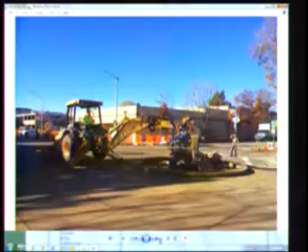On December 23rd, the previous California Avenue fountain was demolished, and the whole plaza has now been regraded and torn up so that we can begin building a new, more inviting plaza for the public.

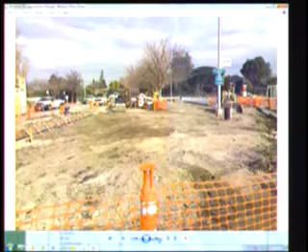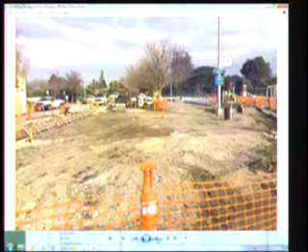The new fountain is by Michael Sabo. There's a picture looking from what was the tip of the island. The fountain would have been in the foreground, and you see the entrance to the bike pedestrian tunnel to the right. So the plaza is expanded, and the site for the future fountain will be further integrated into the plaza.

The timing for that will probably be early February, depending on how things are moving. The fountain itself is coming along beautifully. The water tests have been spectacular.

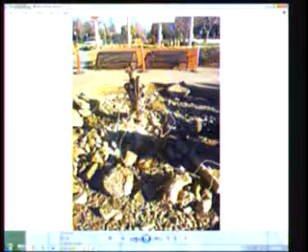There is a time-lapse video of the construction of the fountain taking place in Sabo's studio over this time, so we should have an interesting video of the fabrication of the piece. There's also Michael Sabo taking a video of the demolition of the old fountain.

The next item I have for you in staff comments is regarding the University Avenue tunnels. Just this past Tuesday, we did some further light tests on two different lighting systems to test the saturation and the color we could get from each system.

Ala Ebtekar is teaching a class at Stanford University this semester focused on the further development of the project, a public art practicum completely focused on implementing it. We should have a funding goal identified within the next week or so that we can raise the remaining funds and actually install this temporary public artwork.

And Binta Ayofemi, who is the partner artist on this, is hard at work on the audio portion and the interactive app that would go with it. And that's it for my staff comments.

Great, both are exciting. I think we need to prepare ourselves for the fountain and our drought, and the fact that maybe we won't have water in it for a while. But that's another conversation.

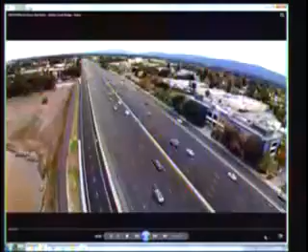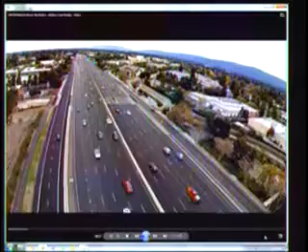For many years, the infrastructure of the automobile has created emissions, noise, and divisions in our communities. Palo Alto has instead embraced a more multimodal future, choosing walking and cycling, developing car sharing, and even self-driving vehicles.

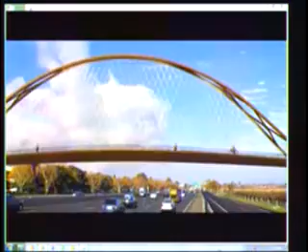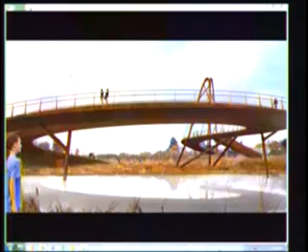Palo Alto's Adobe Creek pedestrian and cyclist bridge is an opportunity to create a more multifunctional, forward-looking infrastructure, drawn from the trajectories of cyclists moving along it and the sinuous waterways of the bay. It is designed not as an icon, but as an experience. Here at the confluence of Adobe and Barron Creeks, we can create an opportunity for experience, for beauty, and a deeper understanding of our natural world.

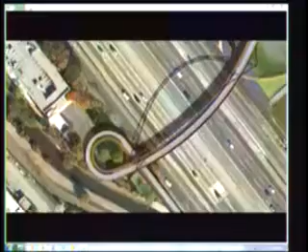West of Highway 101, the bridge ascends in a counterclockwise loop, arcing over the freeway before descending in a broad circle. To the east, a new gathering space provides a place to sit and take in the view, with amenities including bicycle repair. Encircled by the bridge is a new vernal pond and boardwalk, a new way to explore the Baylands.

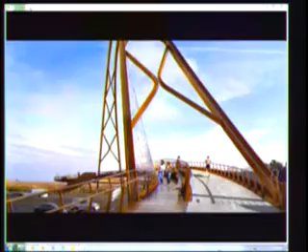Recognizing the challenges of multiple users traveling the same route, the bridge creates dedicated zones for pedestrians and cyclists, lifting one above the other and separating them in plan. Over the freeway, the arch gestures to the sky, creating a cathedral-like space. More than a crossing, it is a space to pause and reflect.

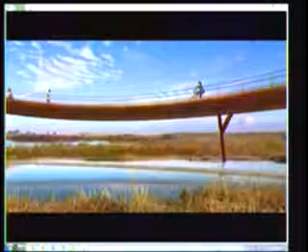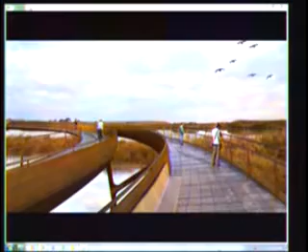Twin pathways over the Baylands integrate structure within their solid interior rails, levitating over the sensitive landscape below, with piers nearly 100 feet apart. West of the freeway, bicycles are outboard, maximizing their turning radius. Here, pedestrians are oriented outward, the walkway expanding to provide a place for birdwatching, resting on a bench, and taking in the view.

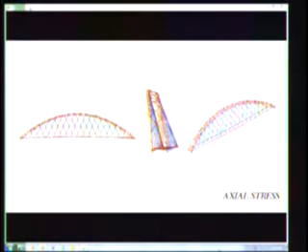Structured as an arch, the bridge leans northward, counterposed to the deck, with a network of thin cables between. A gateway over the freeway, this innovative structure is slender, structurally efficient, and cost-effective, with excellent seismic performance. It eliminates supports in the median and between US 101 and Bayshore, increasing safety and future flexibility. Constructed of corrosion-resistant weathering steel, its warm hues are sympathetic with the Bayland's natural palette.

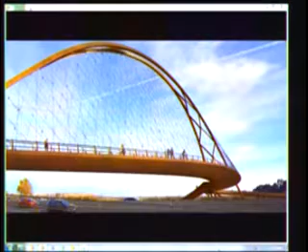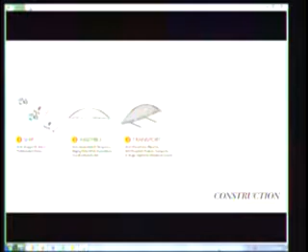Our innovative approach extends to construction. Erected at a temporary location while foundation work is underway, the arch can then be rolled into place with self-propelled modular transports, reducing traffic disruption to a single nighttime closure.

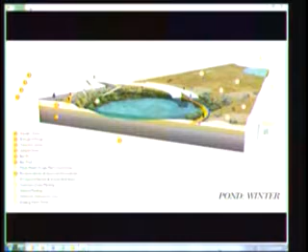The landscape recognizes its strategic place in the broader watershed, leveraging its small footprint for larger-scale change through hydrologic and symbolic connection. Stormwater is captured from the bridge, bike path, and frontage road, treated and routed to a new basin. As this water mixes with seasonal groundwater and residual bay mud salinity, this vernal pool creates a new ecological niche.

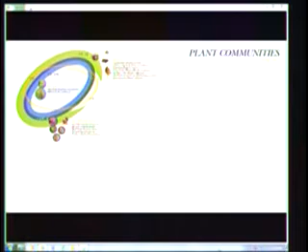Overflow and gray water from a possible bathroom and drinking fountains can be recaptured in tanks concealed in the bridge abutments, irrigating vertical gardens of pollinator species flanking their sides. This site, like the rest of the bay, must address sea level rise. The design anticipates this change, enabling future ecologies and habitats, and communicating the importance of resiliency.

Bridge lighting is designed to conserve energy and be environmentally sensitive. Integrated sensors trigger white light in response to motion, guiding users along the pathway. From the freeway beneath, a jogger is visible as they approach, a comet's trail arcing overhead with the passing cyclist.

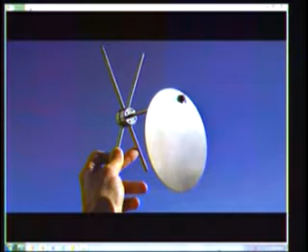Finally, a large-scale artwork is integrated into the bridge, utilizing technology to engage the natural phenomena of the site. Brushed stainless steel discs are fixed to the cable net, weather vanes swaying in the wind, deterring birds and ensuring their safety. Undulating with each gust and passing vehicle, they sparkle in the sun, an ineffable experience of motion and light.

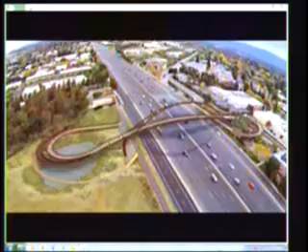We look to places like Palo Alto for what is possible, for what is next for smart, forward-looking cities. We hope this new bridge can similarly be a model, a confluence uniting the community, the landscape of the bay, and our shared future.

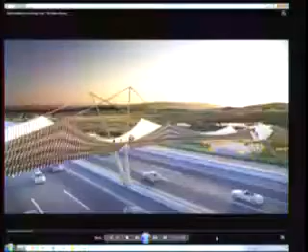We were called to the competition to connect Palo Alto to the Baylands Preserve. So the real question for us was how to get across in an inspirational way, in a beautiful way. The structure in its simplest form models the frame of a wood frame kayak covered with skin. Our poetic response to this project is that of portage, moving people from one side to the other across this barrier.

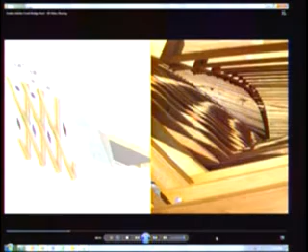A kayak is a very solid structure, but very light. Using wood as a material is key in providing the most minimal impact on the environment. The lightest material will provide the most economical design and feel most appropriate, linking the communities of the high-tech world with the sustainability aspects of the bay.

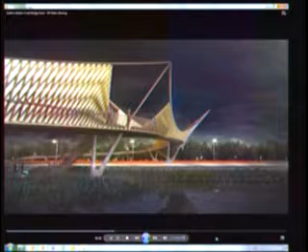The way this bridge occupies the land is really one of tremendous respect. This is a major bird watching area in the Pacific Flyway, everything from hawks to waterfowl - it's extraordinarily diverse. The bridge itself becomes that first experience of coming to an observation deck and having that opportunity to catch your first glimpse of the very rich ecology, of the very rich bird life that is found in and around the preserve.

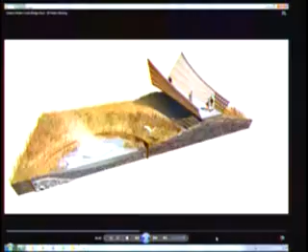What's really spectacular about this ascent and descent is the relationship - it will collect all the water across the span. That will go into a basin, bring it through this amazing artwork by Ned Kahn that will allow the water to go down into the soil, back into Adobe Creek, purified.

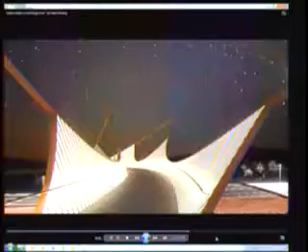The air will be purified by a sustainable forest and offer it up to the community artists. The forest will be replanted at that time, and by such will sequester carbon over its lifetime, thus purifying the air that surrounds it. The solar energy that's created on site will be used for all activities, both to purify the water and to run the electricity for the bridge. So we will have an energy neutral project as well as a carbon neutral project.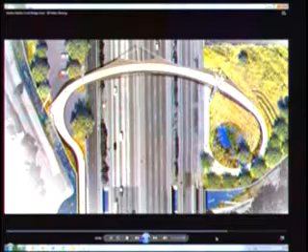The bridge itself became this very light structure, and it touches the land very lightly. So the experience of walking across the bridge is really one of floating. One of the ways to provide the most economical span crossing is to reduce the length of the bridge. To do this, we lifted the structure to the sides, and by doing so, we allowed the structure to pass over the highway in the most minimal length of path.

This reduces the overall cost of the project, and we would like to try to provide a bridge that minimizes the amount of waste for this crossing, to try to be as sustainable as possible. In fact, we would argue that our bridge has no footprint whatsoever. As we progress as a society, ecology is not one thing pure and simple, separate from people, but in fact it's the bringing together of the two systems, quite honestly.

So I don't think that team is here. But they haven't been showing up to the other boards and commissions. But I would just draw your attention to the guiding principles, which is one of those attachments. I think it's, what is it, B - I don't have the packet in front of me. But there's interconnectedness, innovation, conservation, and versatility, I believe. And so those are the kind of themes that the council thought was kind of the guiding principles to inspire these designers to create something like this.

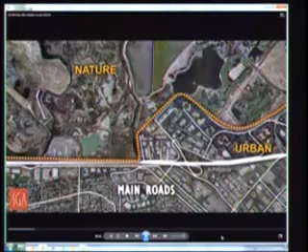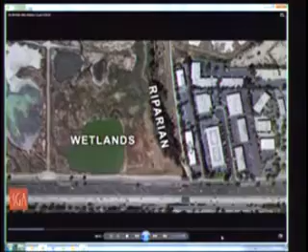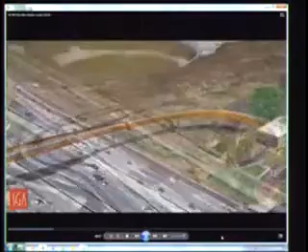It's at the transition zone between two biomes. The flowing lines, low-profile structure, and architectural materials evoke the forms and colors of the Baylands. The result is a design that is beautiful and dramatic, yet respectful of context, timelessly modern, bird-friendly, cost-effective, and easy to construct.

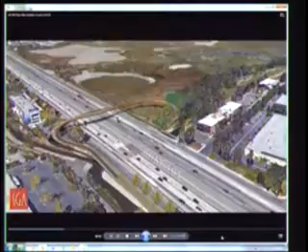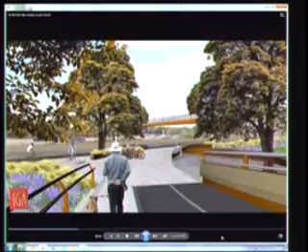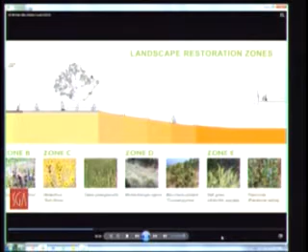Let's take a virtual tour of the project. Along the Bay Trail, just north of Adobe Creek, you discover a small touchdown plaza. Native sycamores along the creek help give shape to this outdoor place. On the wetland side, rings of native plants surround the plaza and draw your eye to the Baylands horizon. You might stop and sit in the shade and watch people, or wander closer to restored wetland areas, discovering how different plant species make their homes at different elevations.

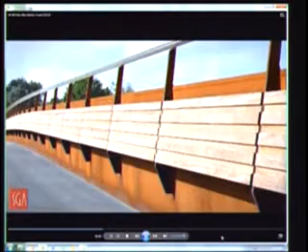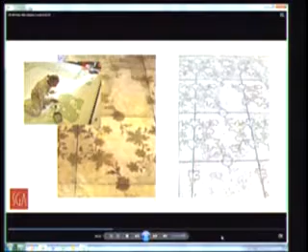Perhaps you notice how the rich earth tones of the bridge structure and lighter tones of the walking surfaces are derived from colors in the natural bayland setting. You discover beautiful artwork in the plaza surface, which was inspired by shapes of local plants.

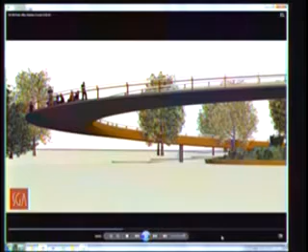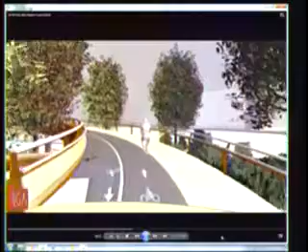The east approach structure sweeps out and up from the plaza in a dramatic, curving form that appears to float without any visible means of support over the wetlands. You are invited by this sweeping form to make your way up a gently sloping pathway. As you emerge from the riparian tree canopy, you are struck by an expansive view of the Baylands. Here, the slow lane of the pathway widens to allow you to pause for a moment or sit down and rest.

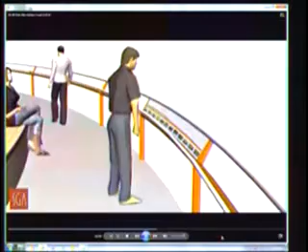Small signs tell you about plants and animals that live below, how the railing is designed to avoid perching spots for predatory birds, and how the stainless steel mesh was selected to prevent bird collisions.

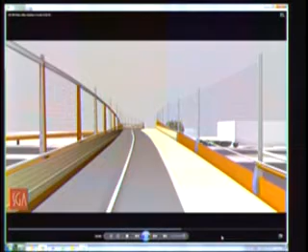As you reach the top, you notice that the stainless steel pipe railing on your left rises to a high point above the edge of the roadway, and then swoops down gracefully to a low point at the center of the bridge, serving both architectural and structural functions. As you enter the fenced span over the freeway, perhaps the interplay of flowing lines of the bridge structure evoke contextual landscape forms.

These lines and a slight increase in width toward the center of the span shape the space, so you experience the main span as a place and not just a tunnel-like passageway. At the west end of the main span, you might choose to take stairs which swoop down to the sidewalk, or you might pause at the lookout over Barron Creek.

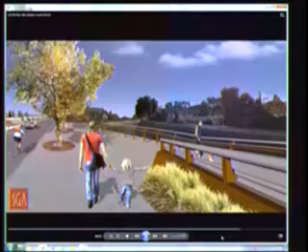When you reach the touchdown plaza on the west side, you notice that the lane lines and colors of the pathway extend gracefully out into the concrete scoring pattern and walking surface artwork. Indeed, the trees and grasses, architectural materials, forms, textures, and artwork which create this pedestrian-friendly urban street space on the west side all come from the Bayland side, much as species intermingle at the transition zone between two biomes.

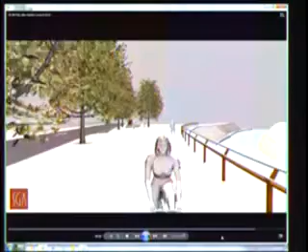Perhaps you pause at the West Touchdown Plaza to look over the creeks or sit on a bench, or you continue on the Adobe Creek Reach multi-use pathway or the bike lane along West Bayshore Road.

The Moffatt & Nichol SGA team is prepared to deliver a Silicon Valley landmark, a statement of Palo Alto's commitment to the natural environment, to a beautiful urban environment, and to quality of life in the Bay Area.

So I don't see that team here. Okay, but we do have Judith Wasserman here, and I'm hoping that she can recap her thoughts and what the competition jury deliberations were, and what was discovered at that meeting on December 17th.

Yeah, maybe. I'll give you a quick overview of how we ended up selecting what we selected. We were charged, the jury was charged by the council to rank the three applicants. We had 20 teams that submitted interest and qualification statements and selected these three from that group, then ranked the three after they made their presentations.

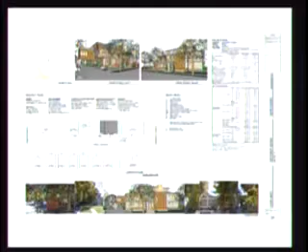For the other commissioners, this location is where the current AAA office is, that's correct. So the current use is a non-conforming use because it's an office building and it's zoned for multifamily residential. So the AAA is going to move out from there, and our plan is to tear down that building and put up this new multifamily project. This is a 13-unit project.

It's basically two buildings. There is a back building with a duplex, two townhomes, 2-story, and the front building is a 3-story building where the third story is rather small, about half of the other lower two stories. The lower two stories have 10 units, two-bedroom units, five units in each of level 1 and level 2.

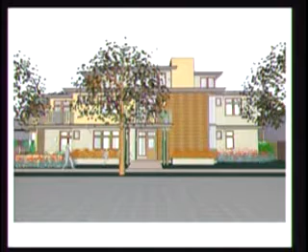So this is what the front is projected to look like, the entry. You see the penthouse at the top level. This is the wall next to the entry, the tall 2-story wall that you see, and that's where we are kind of thinking of an appropriate place to put the public art.

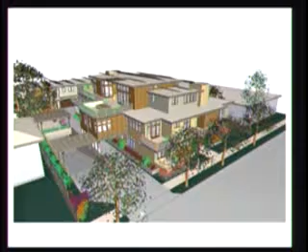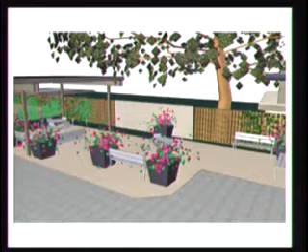Another view. This shows the public place, common area, in more detail. This was our second choice for where public art could be appropriate. It's open, no entry gate, so it's accessible from the street.

He is based in LA, but has done quite a few projects here. In Palo Alto, there's a water course way where he's done many pieces, both water features and non-water features. We visited that place and liked it. Our thought is that it may be appropriate for this project, but we're here to listen to your viewpoint and guidance.

Thank you. Did you have any other comments? Or are you ready? Sorry, so this is a couple of examples of the pieces he has done.

Our idea is that because of the tall two-story flat wall, there should be something vertical in nature that may go with that. Here are a few examples of pieces he has done. This is another one. And this is another one. And this is yet another one.

Yeah, so that's all I have to present. Great, thank you.